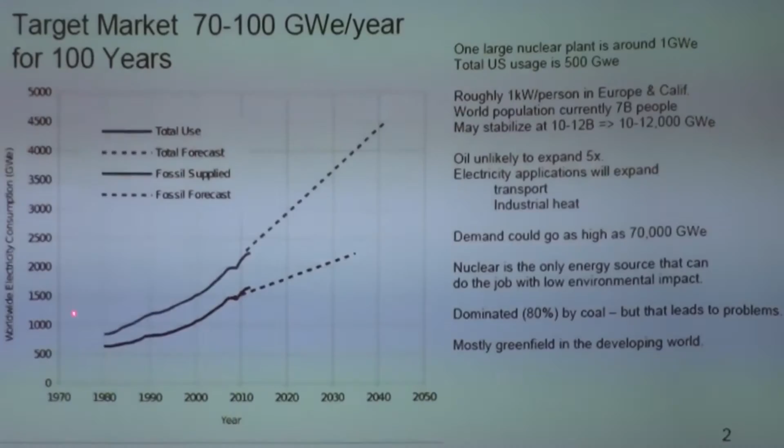This is gigawatts electric. One large nuclear power plant is roughly a unit of 1. So this is roughly equivalent to asking how many large nuclear power plants do we need?

In Europe and California, we use about 1 kilowatt per person. The US as a whole is a bit higher. With reasonable efficiency gains, we should be thinking along the lines of 1 kilowatt per person. Our current population is 7 billion, and it's probably going to grow to around 10 billion before economies grow big enough that population stabilizes. So we're looking at a market of about 10,000 gigawatts electric.

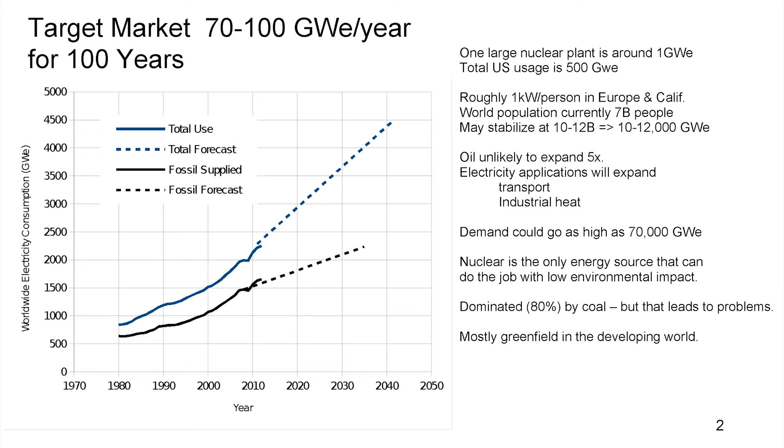But it could be larger, because while we may not be at peak oil, we keep looking harder and keep finding more, but nobody honestly expects we'll find 5 times as much oil as we have. So transport is going to shift, likely towards electricity. That's going to drive up our demand for total generation. Similarly with industrial heat. So there's a lot of reasons to suspect 10,000 gigawatts is still a low-ball estimate, and we might be looking at as high as 70,000 gigawatts electric.

This is a huge market, the size of the whole oil industry today. If you look around at what could possibly supply this kind of energy, nuclear is the answer. The others simply can't meet that demand. But if we don't change the price of nuclear, we're going to be dominated by coal, and you're going to see 10 times as much coal as we have today. That's what will happen unless we can create a nuclear option that's cheaper.

The good news is that most of this nuclear is going into greenfield deployments, to people in the world who don't have electricity yet. So we've got a level playing field of brand new coal versus brand new nuclear. That's a lot easier battle to win than an existing coal plant where you say shut it down, I'm going to replace it with nuclear. That's a hard economic argument to win.

To successfully compete against coal, we need something that can scale up to a very high volume, on the order of 100 gigawatts per year installation. Not 2 or 3, but around 100 gigawatts per year, or you're not seriously competing with coal.

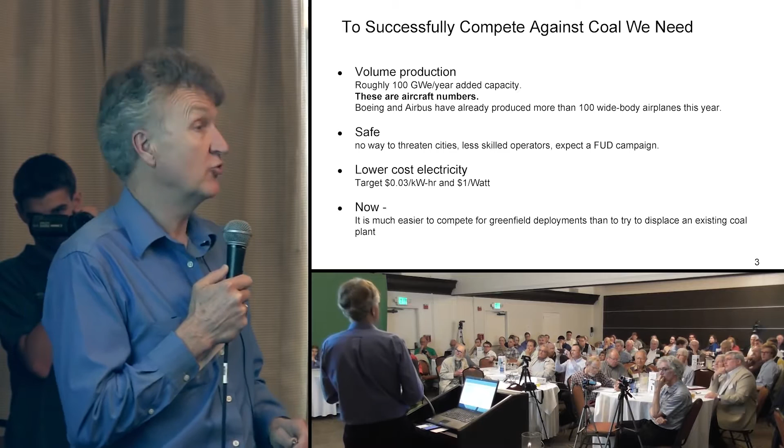But we also have to be extremely safe. If you're going to have 10,000 nuclear power plant operators out there, your skill level is not going to be all ex-Navy nuclear operators. Your skill level is going to drop, and our safety record is going to be set by the bottom 10%. So we need a reactor design that is extremely safe—not just passive decay heat removal, but safe in other ways, so operator screw-ups or bad management orders can't do harm beyond destroying the power plant itself. We have to convince people, the general population, not just nuclear enthusiasts, that this plant isn't going to destroy their city.

If we're going to compete against coal, it has to be lower cost. You can't have a price premium, because the market you're serving is people coming out of no electricity. Even if they understand coal is nasty, it's better than no electricity. Drinking river water is a lot more dangerous than drinking groundwater, and you've got to get your electricity to be able to pump it. It's a matter of life and death for them, and they don't have any extra money. So if you're not cheaper than coal, you're not going to make it. Our target is 3 cents a kilowatt hour and $1 a watt for capital cost.

The other thing is we want it soon, because it's a lot easier to compete for a greenfield deployment than to compete against somebody who's already got an installed plant and you want them to turn it off and replace it with this new nuclear plant. Soon is very, very important. So we don't want to do something that's even better, but 10 years later. Our goal is driven by what can you do now and get started, get going, because anything nuclear, frankly, is better than coal. So if we can make the cost work and get in the market, then we can fuss about reducing waste in the future.

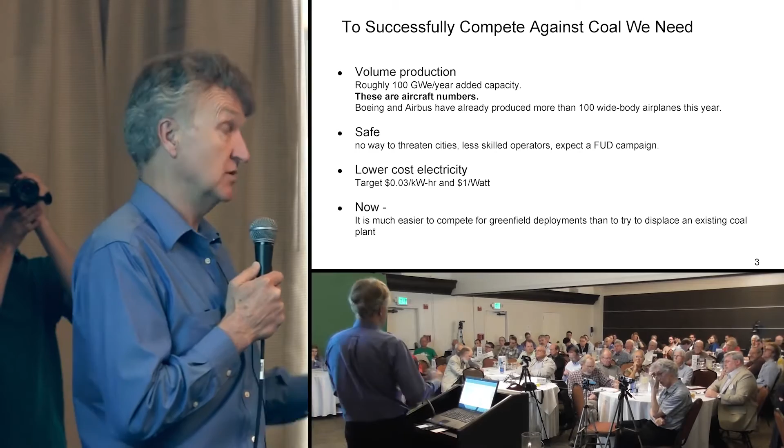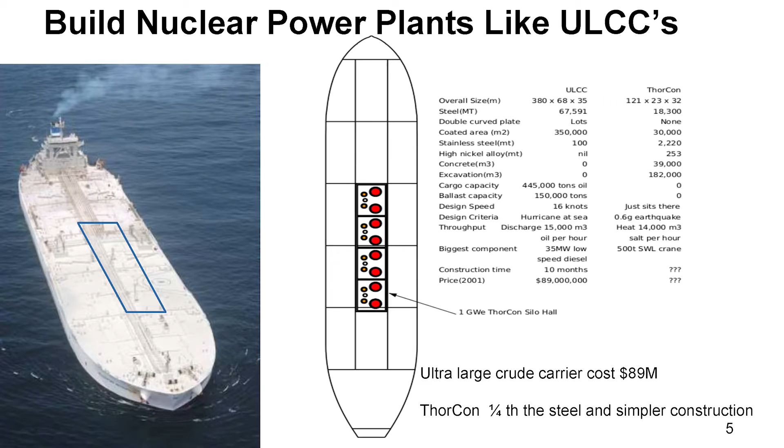So to go into more detail on the volume production end, this picture is of an ultra-large crude carrier, one of the world's largest ships. It was actually designed and built by the founder of our company. This blue box here is a 1 gigawatt power plant.

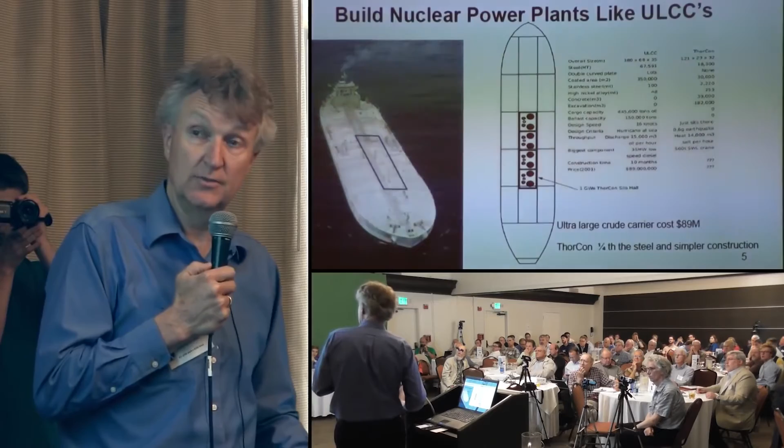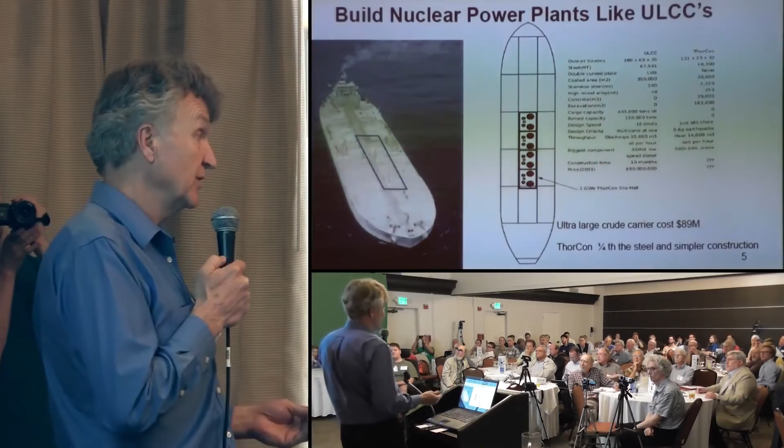Drawn so you can see it head on, this is a 1 gigawatt nuclear island of a power plant, not the turbines and generators and cooling towers, just the nuclear island. And it's small compared to the boat, like 1/4 of the steel. Similarly for virtually all the other numbers here, which are too much to go through, but it's simpler to build and uses 1/4 the steel. This boat cost $90 million.

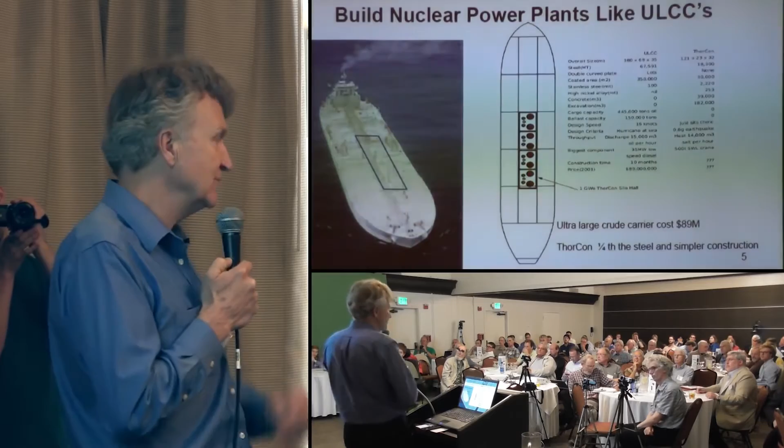So if I can build a 1 gigawatt power plant for anything remotely resembling how much it cost us to build that boat, that ship, then we're doing very much better than with current technology.

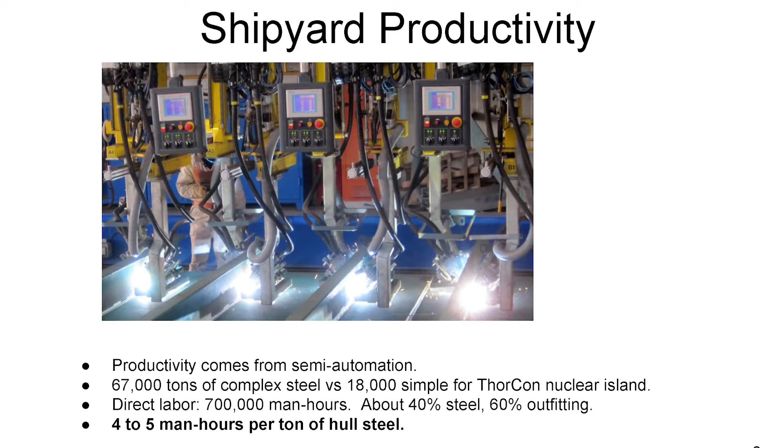The reason it costs so little for that boat compared to how big it is, is that they have shipyards that run things in production. This is for a double-hulled ship. You've got a plate of steel on the bottom, ribs going across, robot welders welding the ribs to the plate of steel, and one person running 5 or 6 different machines simultaneously. Then they flip it over and do the other side, making this double-hulled construction.

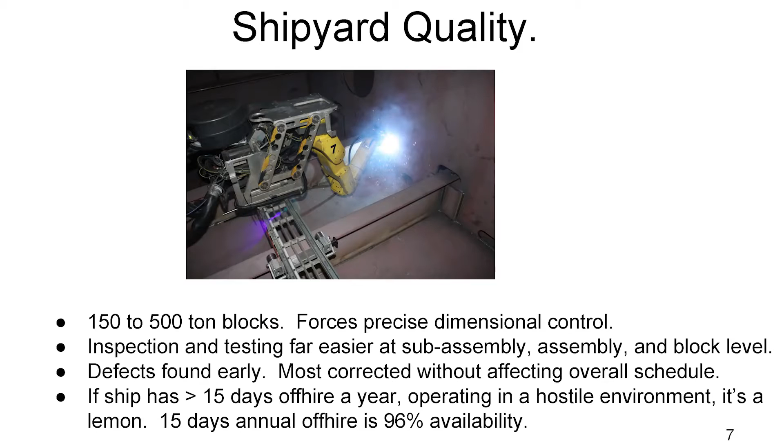We're building the power plants using the same basic technology, actually in the same yards. So our power plant is basically a boat dug into the ground with double-hull steel and concrete poured between the steel. One nice effect of that is you get very high quality control, a lot more uniformity, a lot tighter quality control.

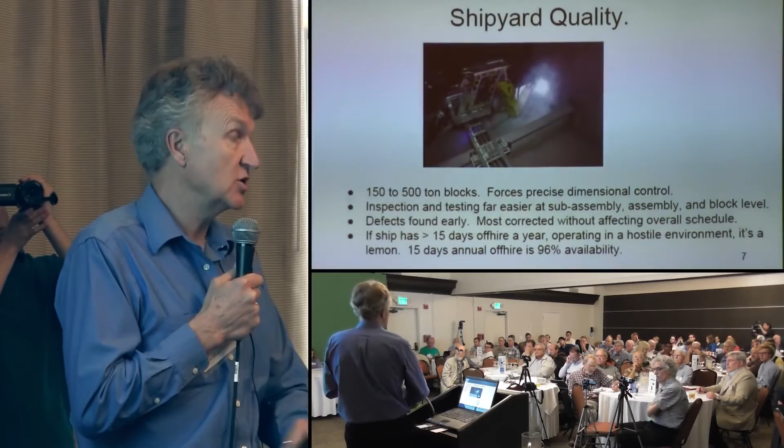We do these in blocks that are 150 to 500 tons, and the blocks have to align in the field very precisely, and then they're welded together. We do the measurements, and they're quite accurate, having to compensate for how much 2-inch thick steel sags when it's set on end. We can do the full inspection on the production line, and if there are any defects, you can reject the block and do the modifications there. You don't have to do this work in the field.

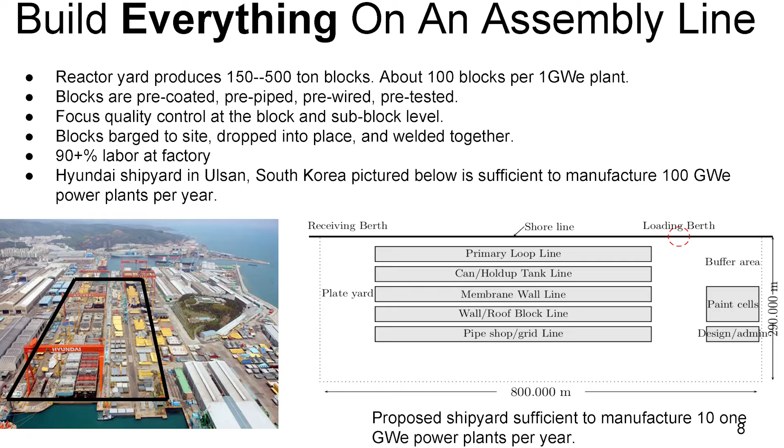So our goal is to get like 90% of the work done at the production line and leave only 10% for the field. A 1 gigawatt power plant is about 100 of these blocks, pre-coated, pre-piped, pre-wired, everything finished, ready to basically plug together like Lego blocks to the adjacent blocks. Once the blocks are all ready, in a normal ship they would be built in the dry dock at the shipyard. In our case, we're going to put them on a barge and carry them out to the nuclear power plant site.

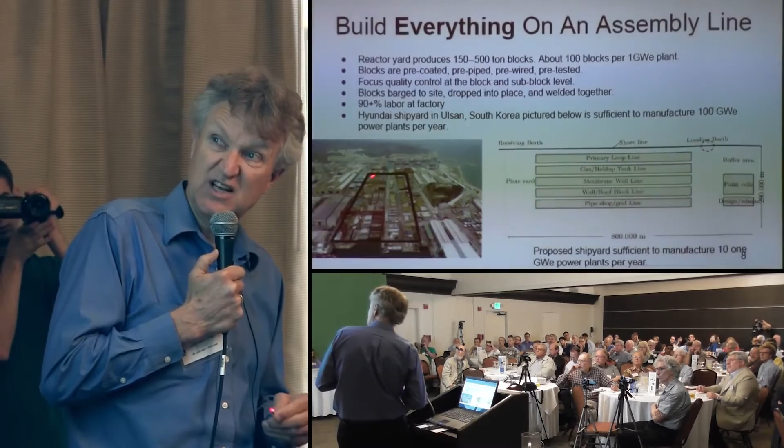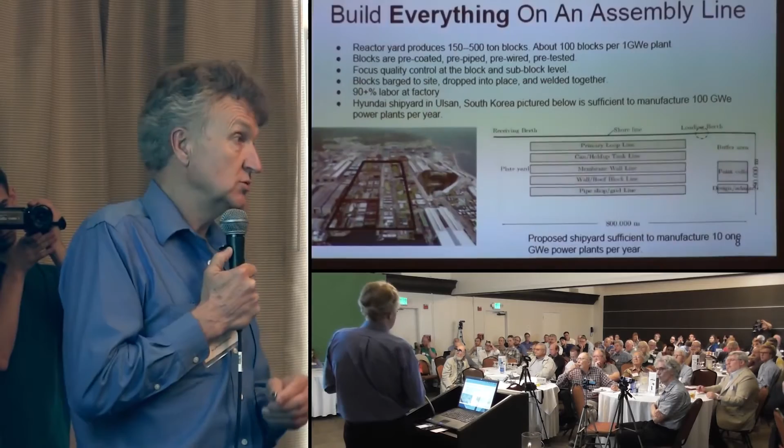This picture is of a shipyard in Korea, run by Hyundai, actually the world's largest shipyard. The highlighted area is what we would need to build a 10 gigawatt per year power plant factory, and this gives you actual dimensions. If we took up this whole shipyard, we would be able to produce 100 gigawatts per year. So the concept of building power plants at 100 gigawatts per year is very, very much viable.

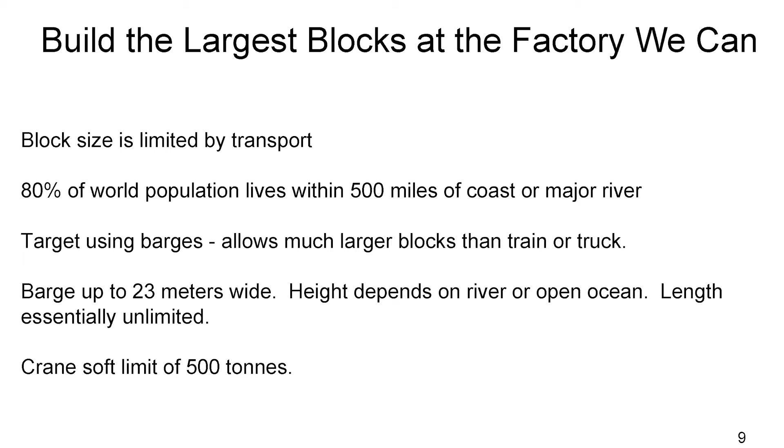And once we get away from the thick forgings of the reactor vessel that you have with light water reactors, the block size is limited by transport. We would love to build the whole power plant in one big block, but it gets a little awkward to carry around. What we notice is that about 80% of the world's population lives within 500 miles of a coast or a major river, so we're planning to use barges for transport, which lets us transport 500-ton blocks much larger than you could fit on a truck or a train.

And that makes it so that we can do more of the work at the factory, more of the inspections at the factory. The barges are up to 23 meters wide, that's set by a lot of the rivers and the locks in the river systems.

500 tons is our current design limit, but that's set by crane sizes, and there are larger cranes, so we're going to be doing some economy trade-offs of whether we should go to larger blocks still or not.

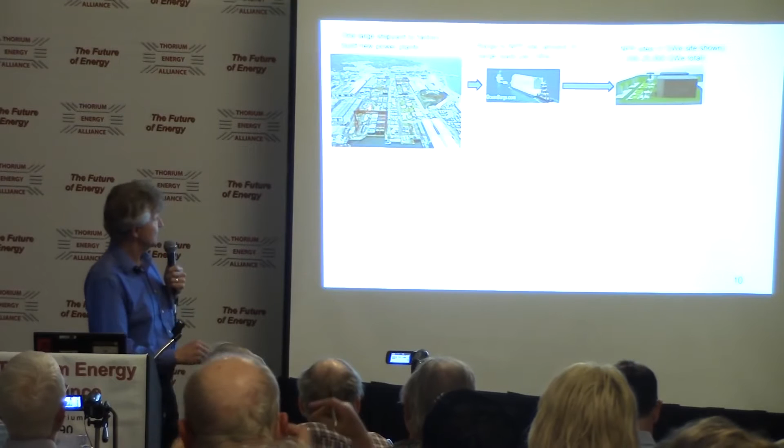So the concept is you have a factory that puts things onto a barge. It takes about 20 barge loads to deploy a 1 gigawatt power plant, so that's what this is.

Once you've done that, every 4 years we exchange our cans, because we have a graphite moderated reactor, and the graphite is going to get neutron damaged. We have to replace it.

We do that by having sealed cans that we put on a can ship, a specially designed ship, that will haul those back to a can recycling center, which basically looks like another shipyard that services about 50 gigawatts electric.

We take the cans in, clean them, inspect them, make sure they're still good to go, ship them back out, or in some cases, like with the graphite, we take the old out and put the new in.

After we've been doing that for a decade or so, we're going to have some spent fuel, and that will go to a fuel recycling center.

We'll start out with just using simple fluorination and distillation to recover most of the salt. That'll let us recover the salt, the uranium, and the thorium. It does not let us recover the transuranics.

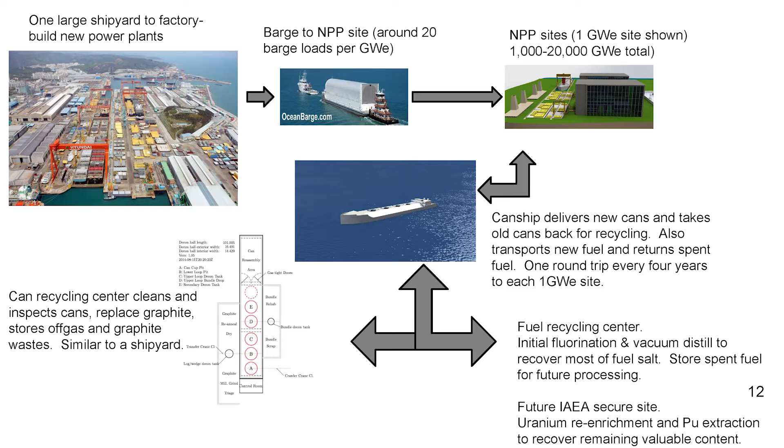In the future, we would anticipate making this a secure site and being able to do re-enrichment and transuranic extractions. Power plants are quite content to eat all of their own transuranics, so our waste flow as far as plutonium, curium, and americium is set by how much leaks through your chemical extraction process.

We have to be safe. This is a 1 gigawatt power plant site. You see the can ship here, and this little red one is a can.

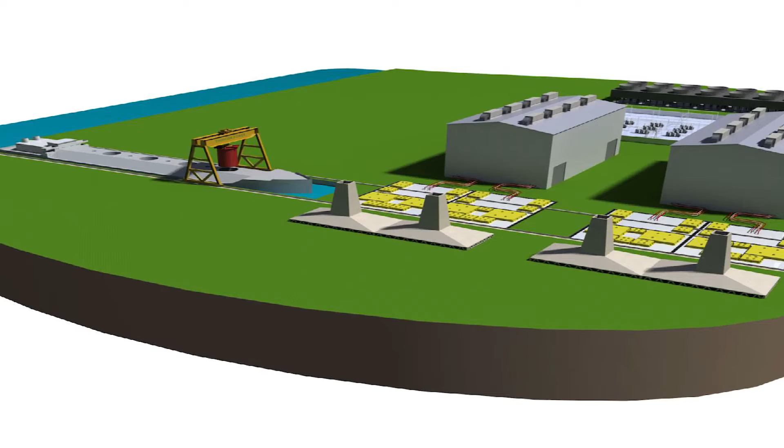That's a 250 megawatt electric reactor. We have a crane that moves along on rails, a gantry crane that picks it up and takes it over. These yellow hatches here are the doors to our reactor.

So our reactor is completely underground, and you access it directly from above. You take off the trap door, and then you lower the reactor down into it.

These closed towers here are the decay heat cooling towers. So we have fully passive decay heat removal.

And then this is a standard turbine generator. We use standard steam cycle turbine generators until other people spend the money to invent the Brayton cycles. We have no objection to Brayton cycle, but we don't want to wait. I can buy the steam cycles today, and I want now.

Then behind that is a switch yard and forced draft cooling. But I'm sure we're going to end up having to support several different cooling styles depending on the site.

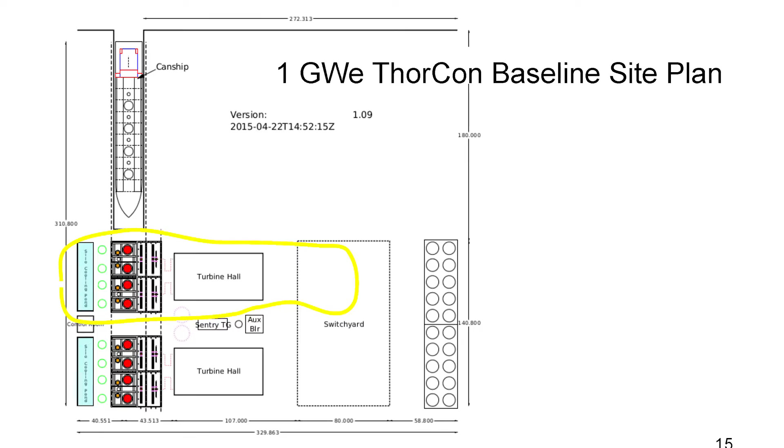So this just gives you some of the dimensions in meters of the different areas. Optimum turbine generator set is about a 600 megawatt turbine generator.

They make them larger, but they don't get any cheaper per megawatt, so we get better modularity by going about 600. They make them smaller, but they get more expensive. So we're sticking around the 600 megawatt.

We have 250 megawatt blocks, so it takes 2 of those to drive it. These little red lines here are the steam lines going off to the turbine generator building. The nuclear island itself is 250 megawatts.

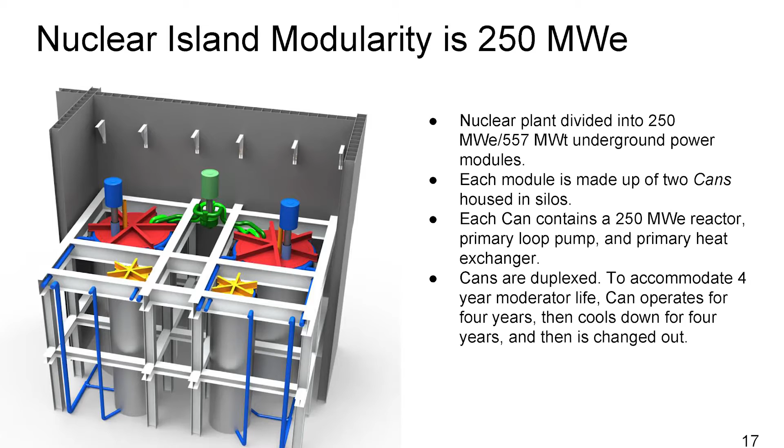We have 2 cans, so we're duplexed. One can is operating while the other can has spent fuel in it and is cooling down, letting things cool down before we transport it over the ocean. So what we're transporting is on the order of 4 years old.

Each can contains the primary loop pump, the primary heat exchanger, and the reactor vessel itself. So all of our radioactivity is really contained within the can.

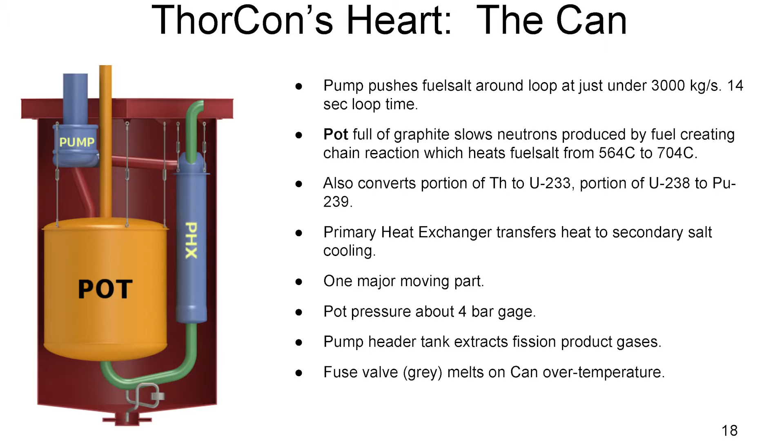We ship a sealed can out, we take a sealed can back. Inside the can, you've got the reactor vessel called the pot. We've got the pump and the primary heat exchanger, and those go around in a loop.

You get secondary salt coming in and going out. And we have the fuse valve here at the bottom. This will go off to a fuel dump tank, which we'll talk about in a minute.

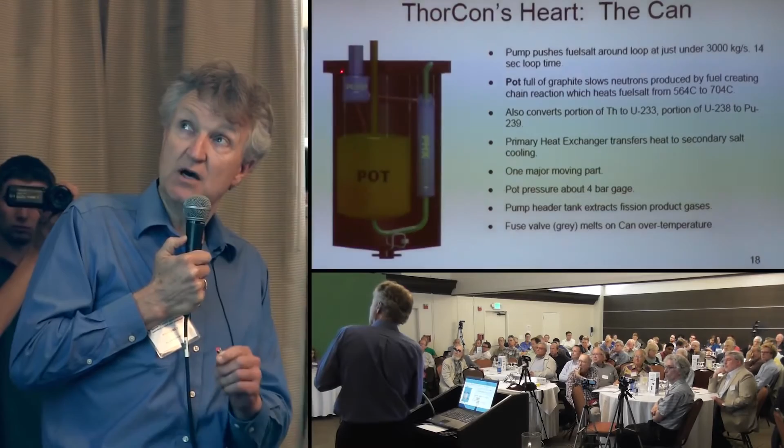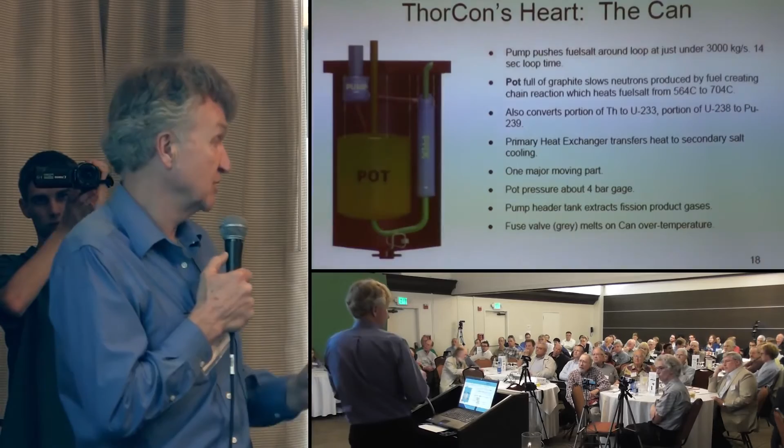Everything is hung from the ceiling of the can to accommodate thermal expansion. That turns out to be a reasonably challenging engineering problem—how do you deal with how things change shape as they go from room temperature up to 700 C? So we've done that by hanging everything from the roof and letting the cables adjust to let the parts move apart from each other and squeeze together with temperature.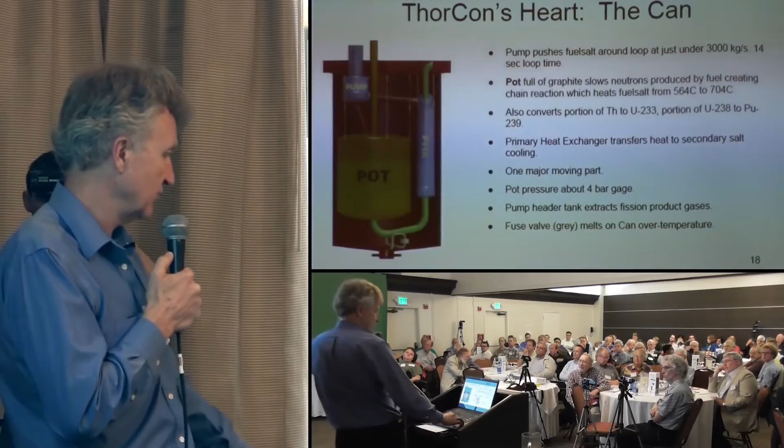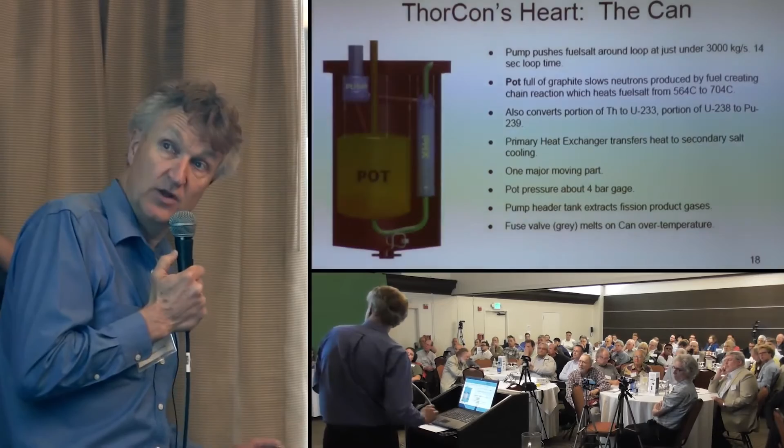The pump is moving about 1 cubic meter, about 3,000 kilograms per second, and it takes about 14 seconds to go around the loop. You only have one major moving part, the impeller for the pump, and the pressure is modest. The pot itself is around 4 atmospheres, and the highest pressure in the loop is 12 atmospheres. So we're dealing with very modest pressures here.

At the bottom, below the can, we have what we call a fuel dump tank—it's just the green part. It's a donut-shaped vessel that will hold all the fuel salt. Because it's donut-shaped, it's very poor for neutronics. Since we can move the fuel, we move it there, and it's in exactly the wrong shape for good neutronics. So the reactivity down there is very low, and if gravity works, anything that overheats will cause something to melt—preferably the fuse valve, but if that fails, then a pipe will melt, and the fuel salt will fall down into this donut where it is not going to fission, guaranteed.

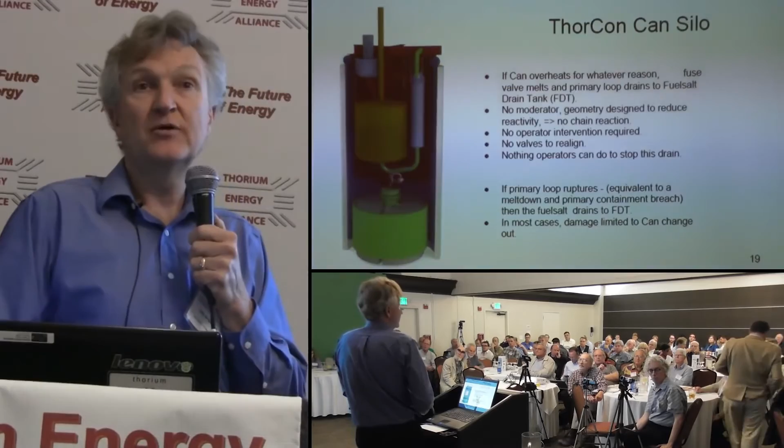No chance, no discussion about possible re-criticality—that just isn't possible to happen. I should also say that the fuse valve and the emergency drain here is something the operator can't prevent. If the Prime Minister calls and says, no, you're not allowed to open the valve, the operator just says, I can't stop it. There's no valve he can possibly fail to open, and no valve he can accidentally leave closed and cause trouble with, like we had with Three Mile Island. So the safety here is not operator dependent or Prime Minister dependent.

The next safety feature is what we call the membrane wall. These are vertical pipes, shown here in dark blue, that surround the can and the fuel dump tank, and they're filled with water. Heat radiates from the can to the pipes. If the pipe gets over 100 degrees C, it changes to steam, and that wants to float—that creates natural circulation. It's a very strong pump. So we have radiation going from here to there that will keep the can temperature at around 270 C.

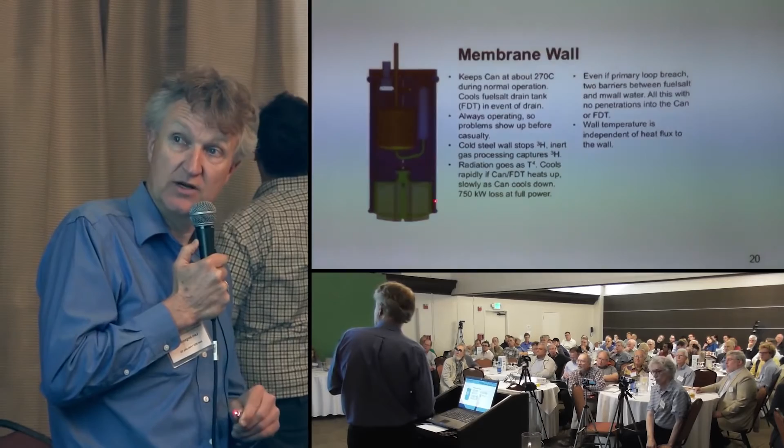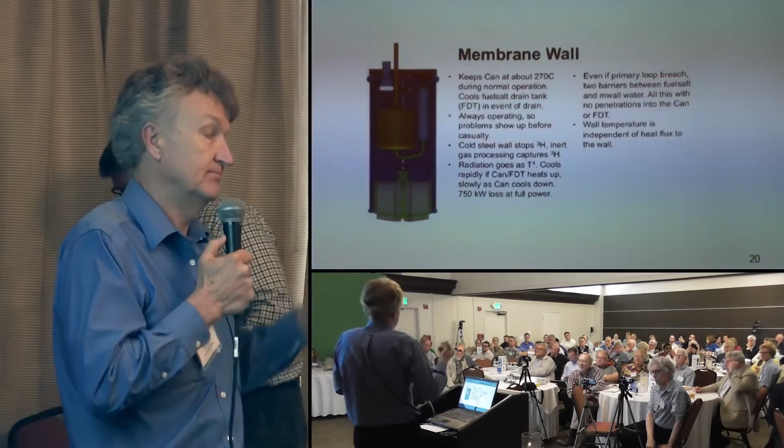Likewise, if you get down to the fuel dump tank, if we have heat generated down here, then it'll pump up from here. So the decay heat removal is there all the time—it's operating all the time. If something should happen, say an earthquake squeezed a pipe and blocked it, we will know because we see it in the flow during normal operation. We don't have to wait for a tsunami to hit to discover we have a problem. So we have it continuously being tested, continuously running, and the operator has no valve, nothing he can do to stop it.

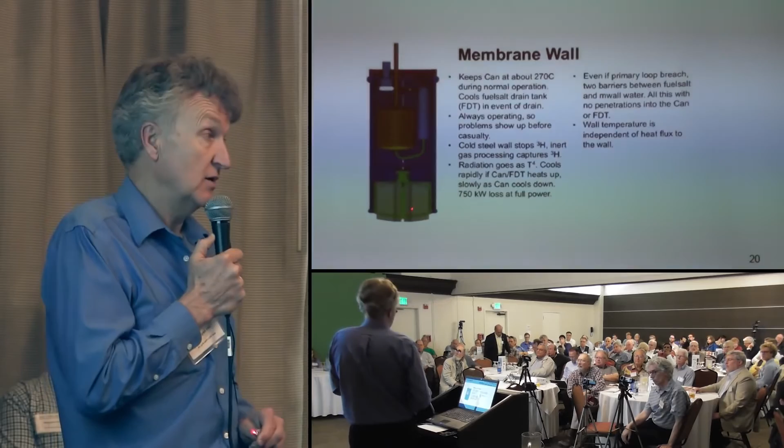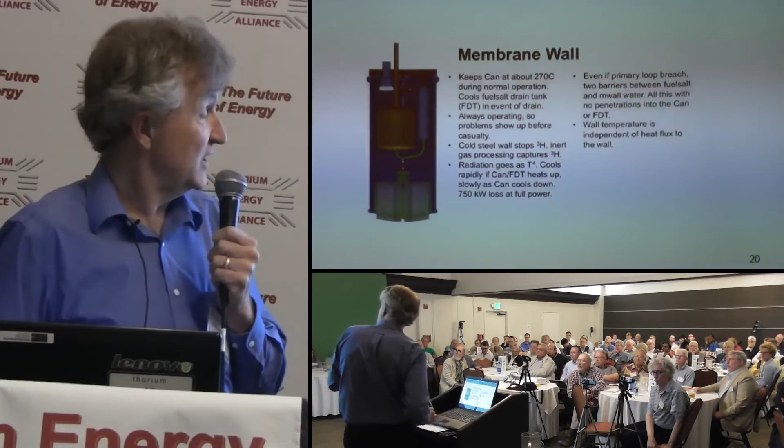It also doesn't penetrate any of the radioactivity area—this is done purely by radiation, no bayonets or anything probing down into the fuel dump tank. We've tested this in software up to 30 megawatts of decay heat power, and the peak decay heat we actually see is 5 megawatts, so we have a lot of margin on that.

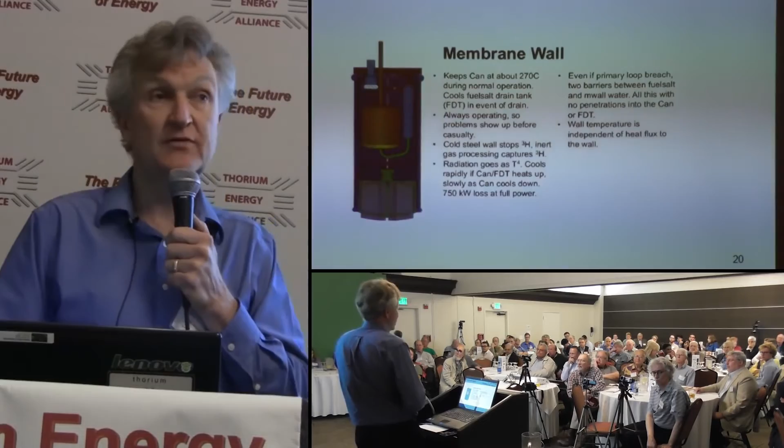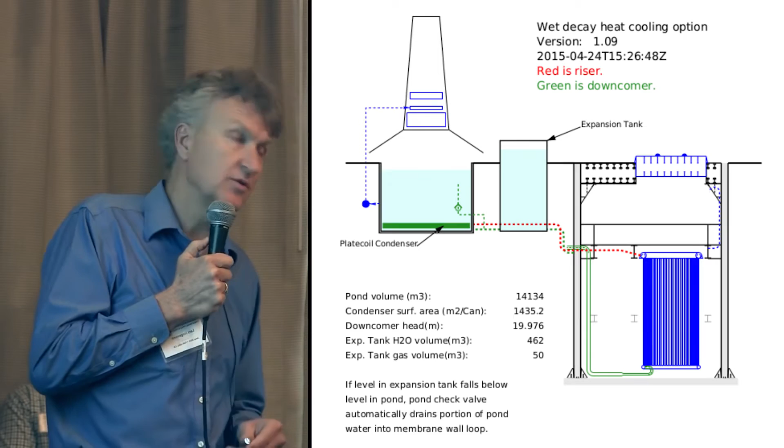Once we get the heat into the water of the membrane wall, we need to get it further away, because there's only so much water there. So what happens is the hot water travels over to a pond. The pond evaporates and rises to a steel cone above it, a chimney, which is air cooled, and the water condenses there and falls back down again. That should give us a nearly infinite supply of decay heat removal. If for some reason you're not allowed to put a chimney up, it's still good for 72 days worth. So we have plenty of decay heat removal, and since this is atmospheric pressure water, it's very easy to replenish if you have any need to.

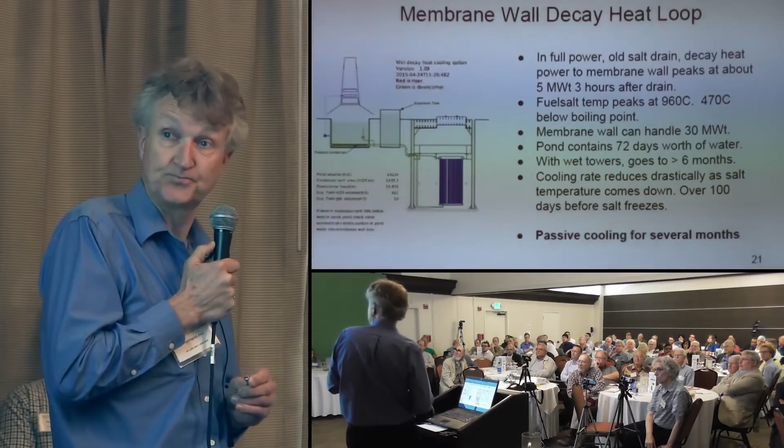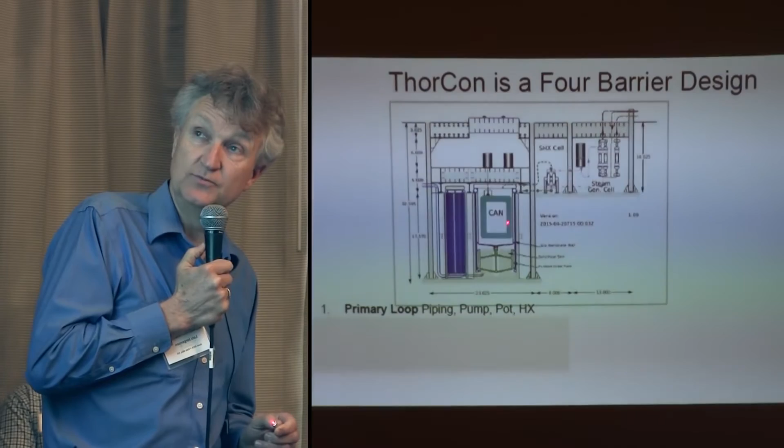Besides decay removal, we have multiple barriers to removal of the radiation. The radiation is inside a primary loop: the pump, the pot, the pipe. So it's inside here.

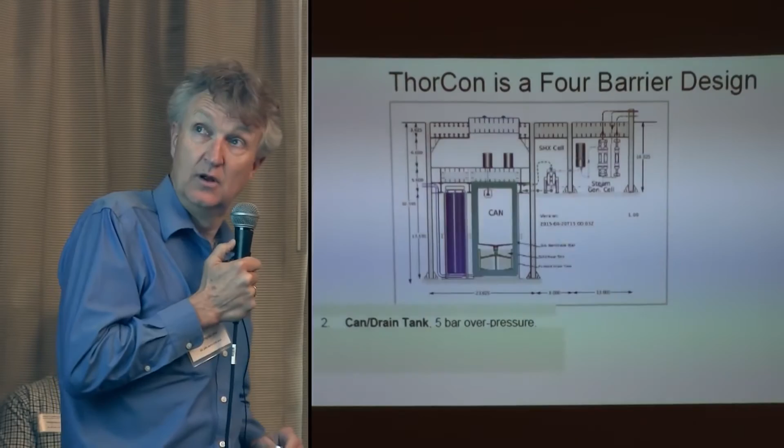That is all inside of the can and the fuel drain tank. So that's the second barrier.

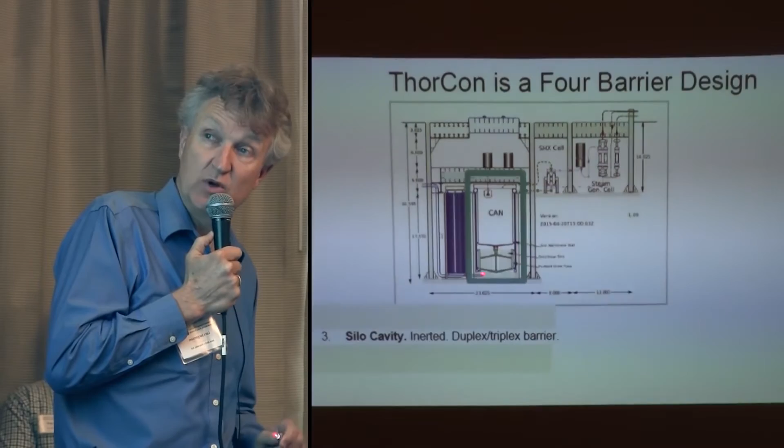The can and drain tank is in something we call a silo, which is a concrete structure, basically a concrete steel cylinder that's also gas tight.

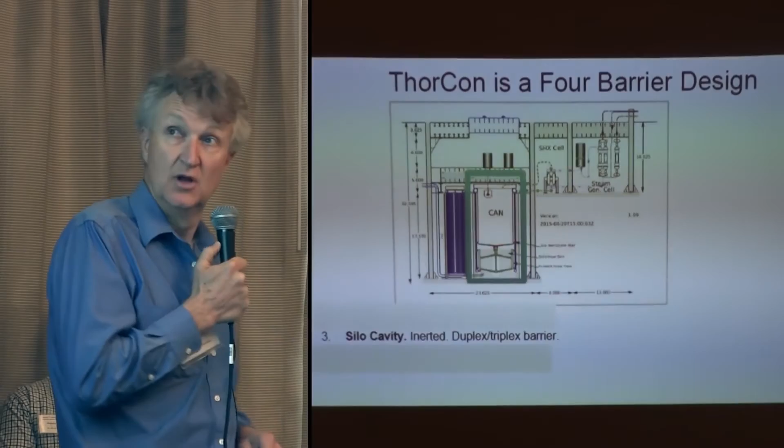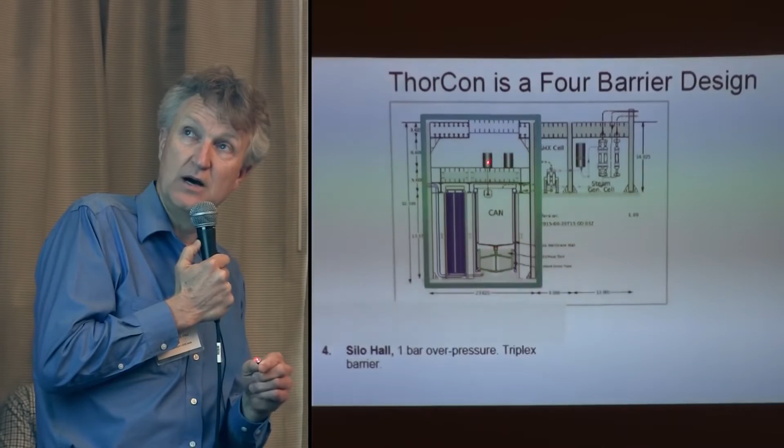And then that whole thing is inside of what we call the silo hall, which includes the motors and the hatch to the outside world. So this is where you finally get to the outside world, and this is all ground underneath.

So we have four barriers to getting any kind of radioactive release, and at least one barrier between adjacent modules. So if you did have one module that goes out, it's very unlikely to contaminate the adjacent modules.

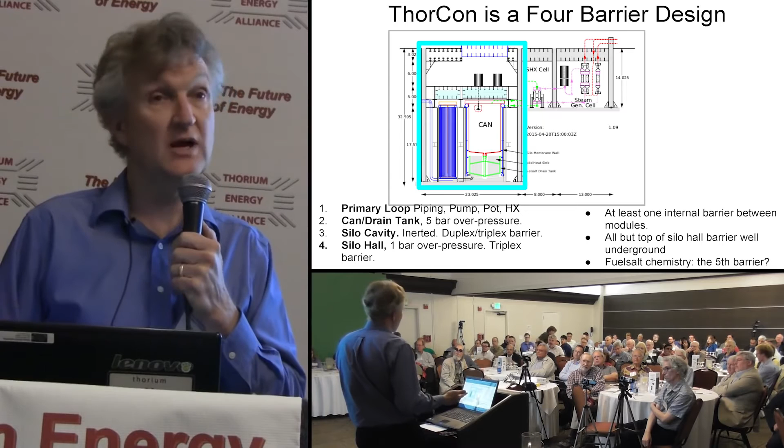We actually, in many ways, have a fifth barrier in that the fluoride salt itself is a very good barrier, in that the dangerous nuclides or elements would be your cesium, your strontium, and your iodine. And the cesium and strontium form pretty tight fluorides that don't want to go anywhere.

In fact, figuring out how to get the strontium out is a fair challenge. It doesn't even boil until like 2500 C or something ridiculous.

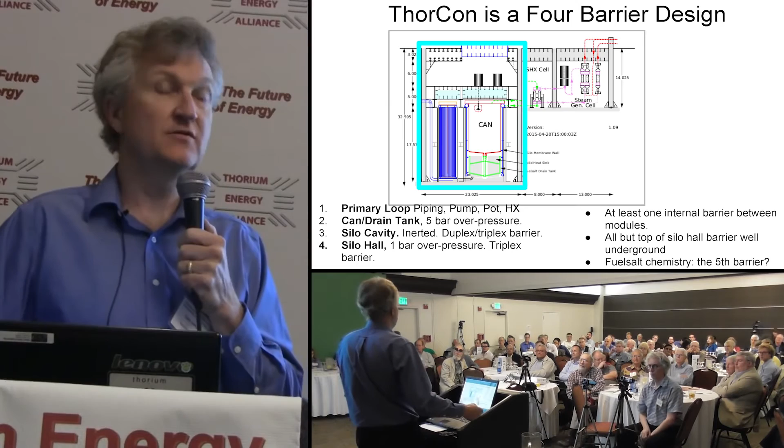So even if somebody sent, say, a bunker buster missile in and went blasting through all of the barriers, you create a spill - it's a spilled salt that solidifies on the floor. It's not something that wants to go into the atmosphere in the first place.

Just a quick word on the neutronics, I'll keep this real short. The core is made up of logs. The logs are made up of planks, and all of that is graphite. If you're familiar with the Ebasco design, that was a spin-off from MSRE when they were looking at MSBR, it's based on that.

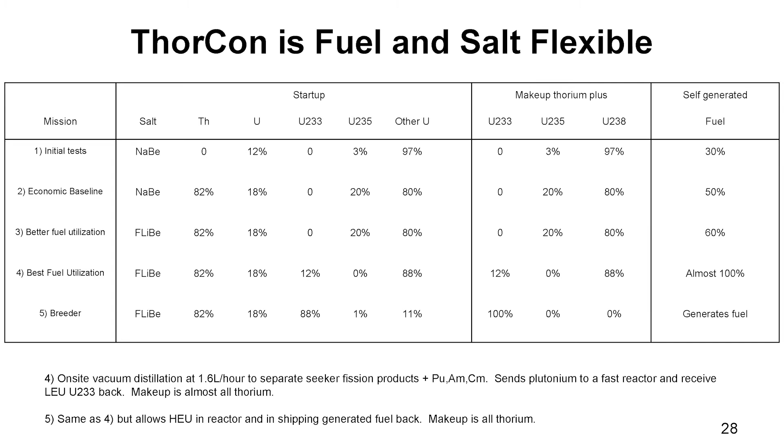We've made an accurate 3D model of the pot and run that both through MCNP and Serpent and get consistent results through them. So we're pretty confident on that, and we've actually extended the model to include a fair portion of the power plant beyond the reactor vessel itself, so we can see what about radiolysis of the membrane wall water and other questions like that.

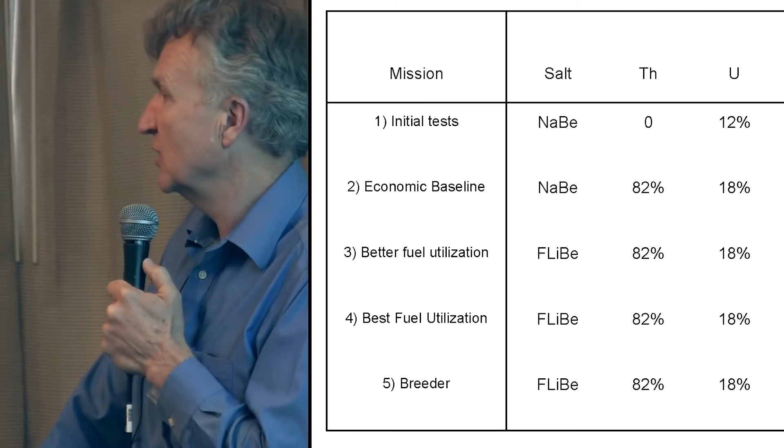We're able to handle fairly flexibly what kind of fuel and salt in the same reactor. We're currently planning on using NaBe, sodium fluoride beryllium fluoride, as our baseline salt because we can buy it now. FLIBE is a little harder to get by, and we don't want our schedule to be dependent on when we can buy FLIBE. So we make the economics work with NaBe. When FLIBE comes along, we can switch to it.

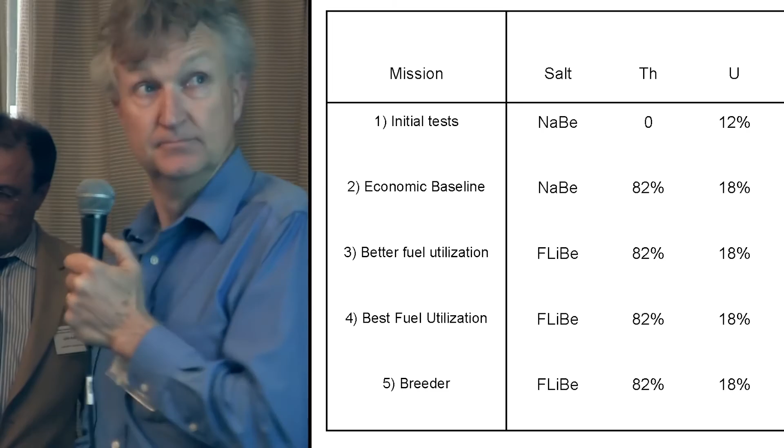Likewise, what enrichment we can start with depends on time. Early on, we're thinking we might be stuck with 3% or 5% uranium, and then later on, we'll be able to switch up to 20% and get better efficiency, better economics. But it just changes the economics by less than a penny per kilowatt, so it's not a super critical thing.

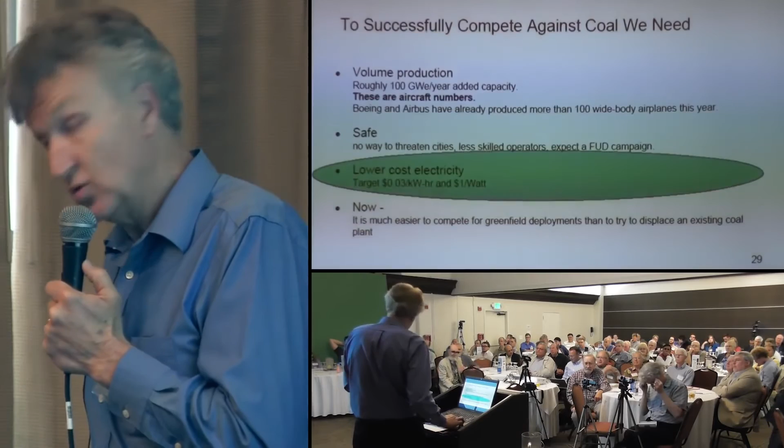Going to derail for a second and talk about should-cost versus did-cost. Should-cost would be, if we set up a manufacturing line, how much does it take based on putting in the materials and the skills we have to put in, the labor we have to put in. Did-cost is, and then what happened when you got in with all the regulations. So we're going to focus on what it should cost.

The regulations are going to come in on a country by country basis, and it's going to preclude us from certain countries until they come to their senses.

That turbine hall that I showed you in the picture before, this is the one turbine hall for a coal plant of a similar size. It dominated ours, and in the coal plant, yeah, it's there someplace.

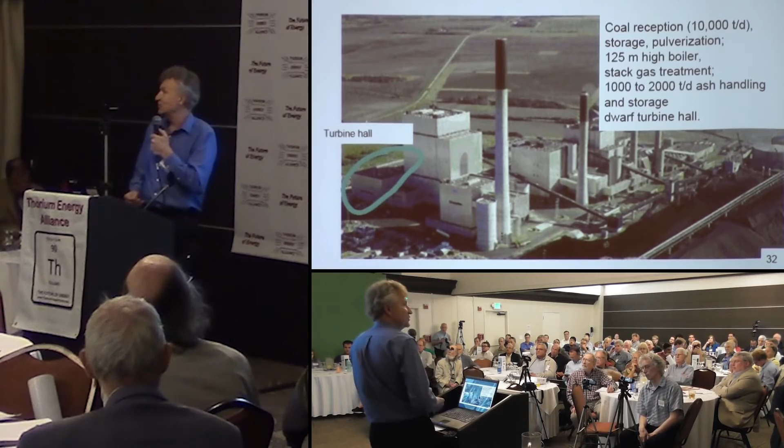So competing against coal doesn't have to be that hard, and they've got the hard job. They've got the guys that are going to move 10,000 tons a day. They've got the guys that got 10 times as much building as we do. We should be able to beat them, and we can.

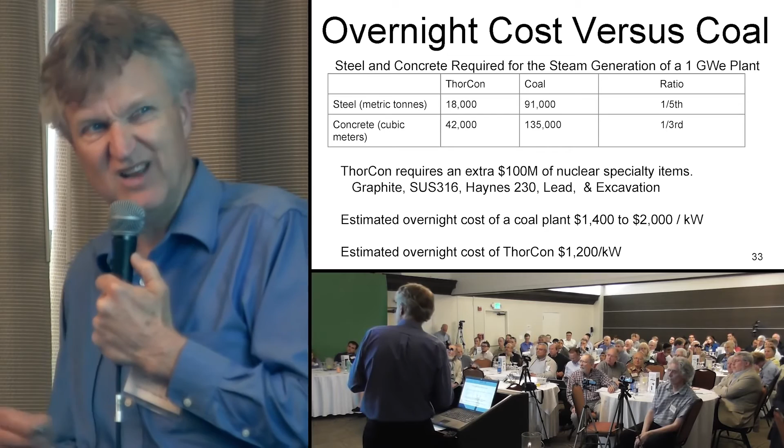So on steel, we've got roughly one fifth the amount of steel as a coal plant does. For concrete, we've got about one third the concrete that the coal plant does. So our materials cost should definitely be significantly lower. We do have some exotic materials, so that adds up to about $100 million per gigawatt.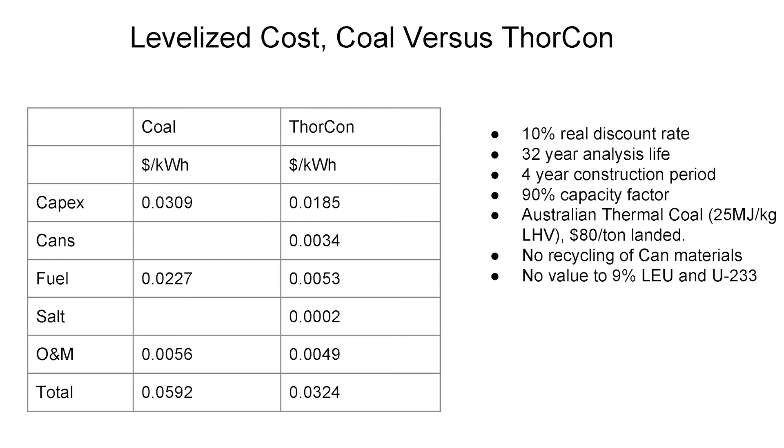So if we get to the levelized costs, I can go through all the details here, but bottom line, talking about roughly 6 cents a kilowatt hour for coal and about 3 cents a kilowatt hour for Thorcon. It's roughly where we think we're at.

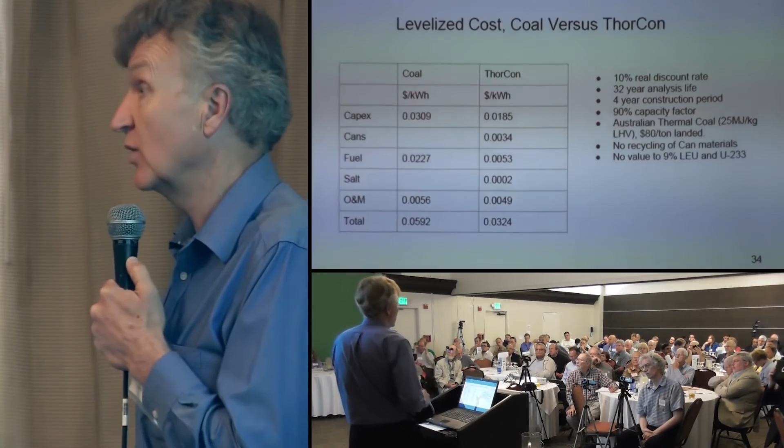The other thing we think is important is if you're going to have 10,000 units deployed, inevitably some of them are going to break. We can't say why or where, but something's going to break someplace, sometime, and we want to be sure that's not a significant event. So all the modules are replaceable, and you have hatches on top that let you come in, take the module out, and put a new one in.

That's quite different from existing light water power plants, where they have to deal with very large pressures and a large inventory of steam and water that has to be contained. Because then you have to cut through the concrete mausoleum to try to get in there and fix things, and that can be quite expensive and has actually ruined some power plants.

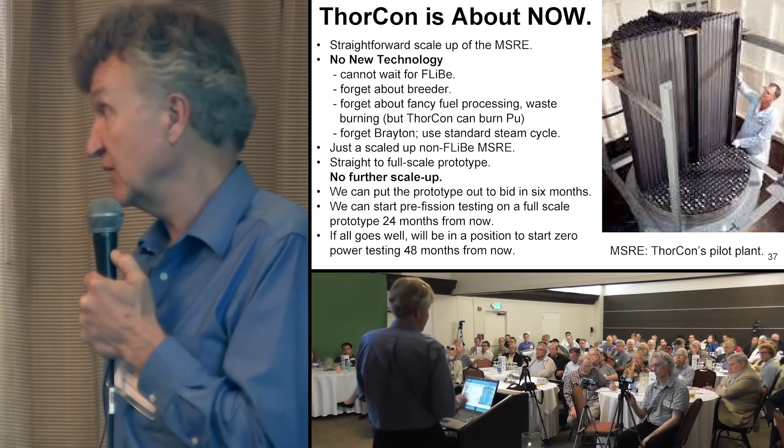Finally, it's about getting it ready now. So we've started with MSRE, and we've made sacrifices in neutronics performance, somewhat in economics performance, in order to keep the schedule short. We're not depending on when we can get lithium-7; we can do just fine with NaBe. We're not depending on when we can process the plutonium, extract it, and recycle it - we have some spent fuel, we'll stick it over in the corner, and when the process is ready, we can go back and clean it up. It's not going anywhere. We're not going to go with the Brayton cycle because it's not here now. We can go buy steam power plants and compete with coal now.

We do plan to build a full-scale prototype. Our prototype will be 250 megawatt electric, and once we've tested it and abused it, put it through all accident scenarios, we can tell people in the city: no danger is going to happen, because we've tested it, we've actually done it. We'll ruin a power plant in the process of that testing, but we'll be able to give people that reassurance, that safety.

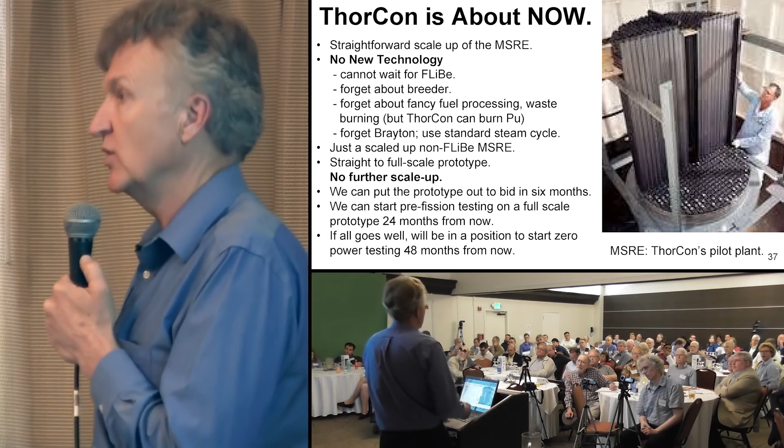We think we can get to pre-fission testing in about 2 years, and to fission testing in about 4 years, based on the speed of technology and how fast we can get the work done. Now, if the regulation system is slower than us, that will extend the period. We have some countries where we think we could just add 1 year to that schedule and work in those countries. The other factor is finance, which I don't have answers for right now.

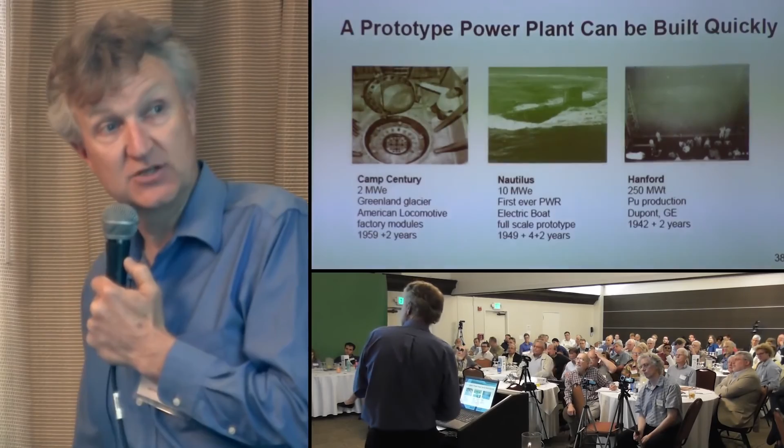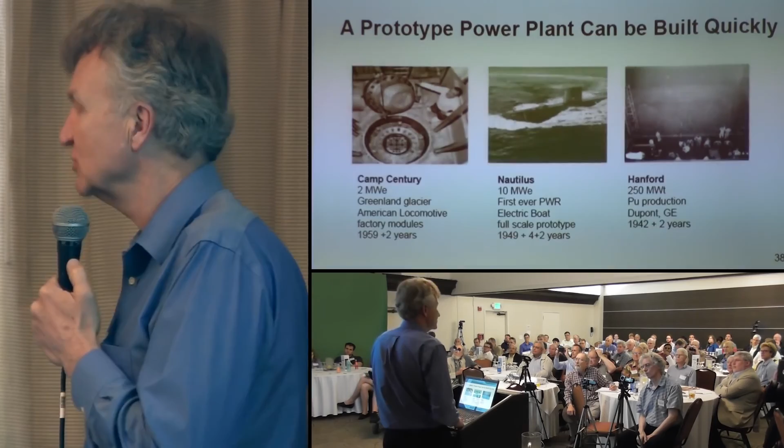That kind of schedule seems crazy to people used to the nuclear industry, but I'd point out that Camp Century was built in 2 years. The Nautilus was built in 6, and that was the very first one with lots of extra challenges being a submarine. Hanford was built in 2 years. By those standards, ours is a rather lax schedule. So this sets out the schedule to full manufacturing, factoring in deployments and where we think we're going to go - roughly a decade, we think we could be in volume production.

Your construction costs are $1 per watt, correct? Yes. What is a typical power plant right now? For nuclear power - about $8 a watt in the US, and $6 a watt in UAE, something like that. 5 or 6 in China. Is that $8 in the US a lot to do with regulation, a very significant cost? A third of it is attributable to regulatory costs. Partially it's the fact that it's a light water reactor, so most construction happens on site, and you don't get the benefits of an assembly line. Partially it's the very thick concrete structures and lots of rebar, which is expensive to build.

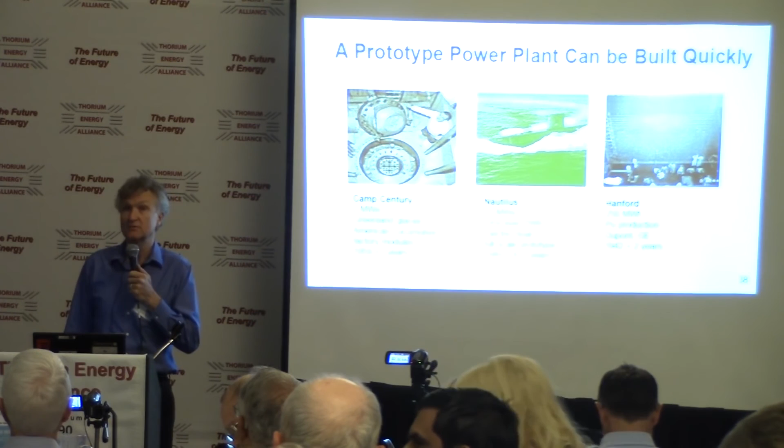How big is your team, and what will it take to reach your goals financially? Our team right now is about 6. We're looking at roughly 10 million for the initial design, to get through bids and get bids from subcontractors ready. Then about 100 million to get the pre-fission prototype built and tested, and about 700 million to get the fission prototype tested.

How did you make the decision between operating as a company that sells reactors to utilities versus a company that owns reactors and sells power? I don't think we've made that decision, and I think that will probably be made by the guy who comes up with the $700 million check.